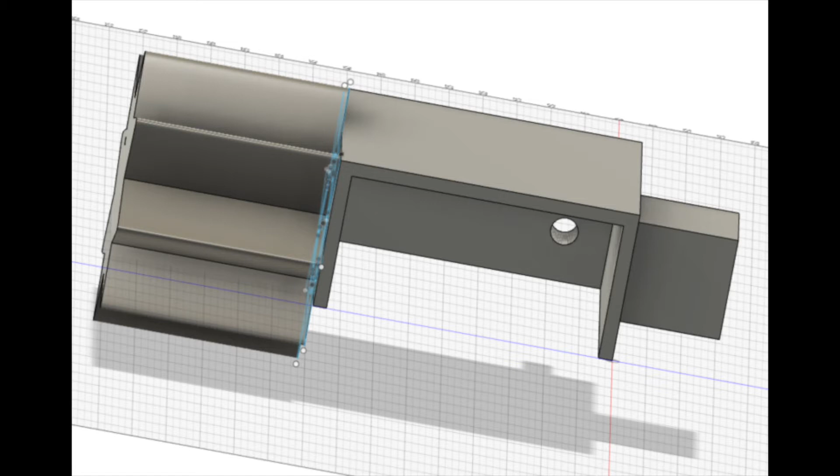The Model RS device is portable, inexpensive, and easy to install, while also self-sufficient, allowing nonprofits, corporations, or even governments to easily purchase and distribute them to rural communities that lack sufficient funds to pay for a more expensive model in bulk without additional installation or energy costs.

The device consists of a filtration system, pump, hydroelectric generator, and a holding tank, with the generator being its most unique feature. It harnesses energy from a river or stream water and does not require any external fuel or power.

The filter is a hybrid of a reverse osmosis filter and a standard polypropylene filter, with extra layers of sponges to promote durability. There are also replacement filters included with the device for cases of wear.

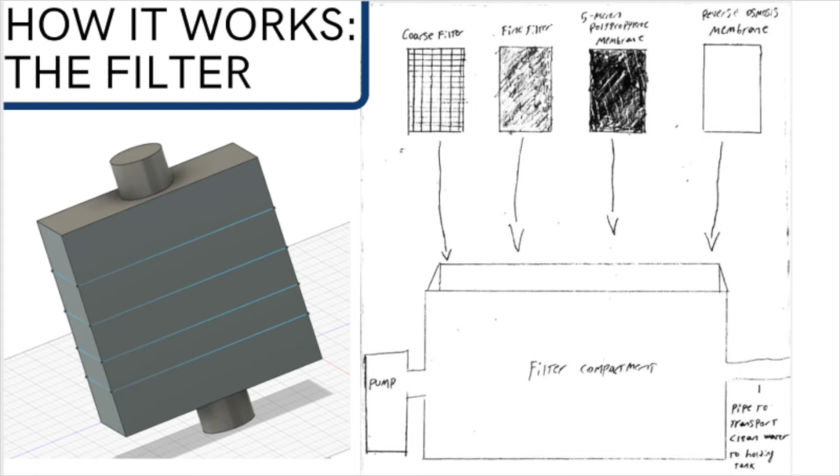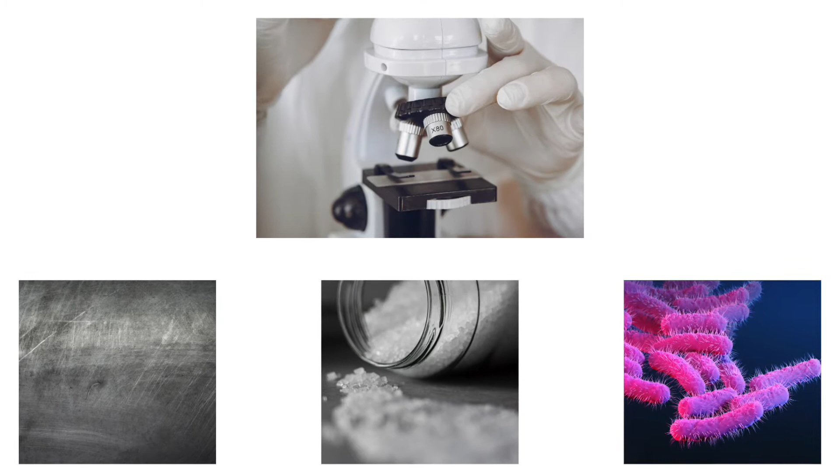All sizable debris is removed by the time the water reaches the RO membrane, with only microscopic bacteria, dissolved pollutants, even salt, and chemicals such as lead, copper, and sodium remaining, which are promptly eliminated during the RO process. Due to this, the Hydrovolt can be used in brackish rivers and estuaries.

The hydroelectric generator is divided into three parts: the stator, the rotor, and fins. The stator is a horizontal iron pillar that has copper-wound iron blocks on every one of its sides. The rotor, lined with magnets and a ball bearing, connecting to the stationary metal shaft, serves as the engine's protection to the internals from the water as well.

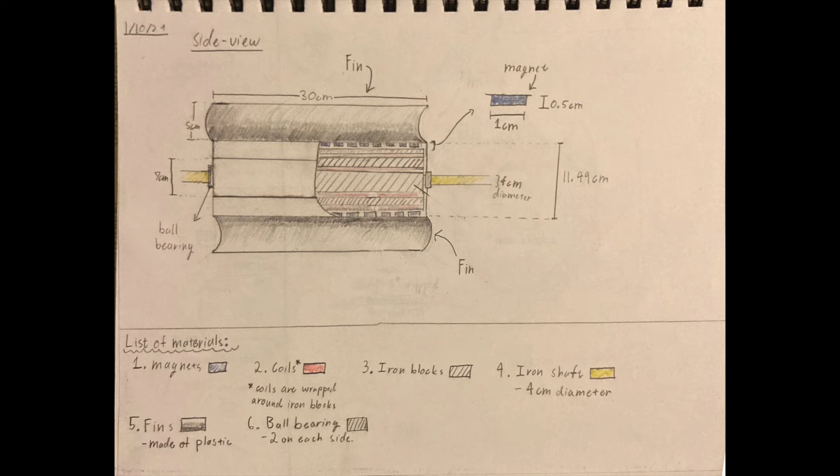The curved fins protrude out of the rotor to the base of the device to maximize the amount of kinetic energy received from the water currents, which rotate the rotor around the stator. This induces an electric current in the coils, and the quicker the rotor rotates around the stator, the more electricity is produced.

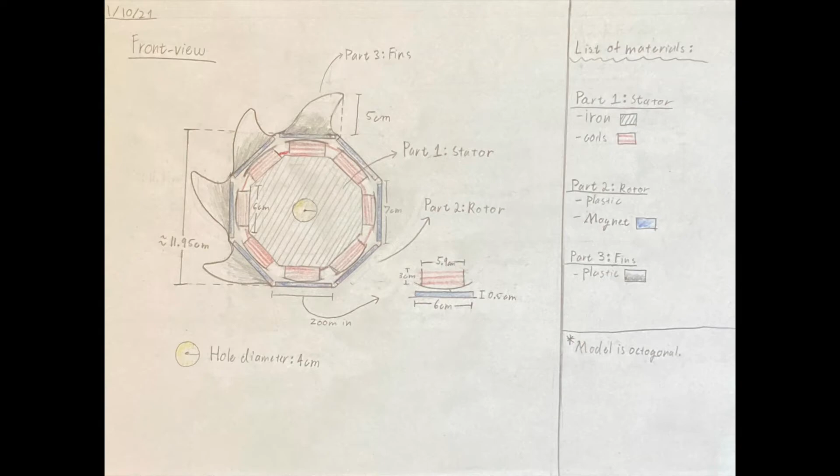The Hydrovolt Model RS is specifically tailored to fit the needs of small communities with access to only polluted water sources. It harnesses energy from the water that it is purifying and does not require any external fuel or power.

While Hydrovolt has competitors in the field of water purification, none address limited access to clean water and electricity in a cost-efficient and convenient manner. In fact, Hydrovolt is the first company to establish the new and promising field of hydroelectric water purification.

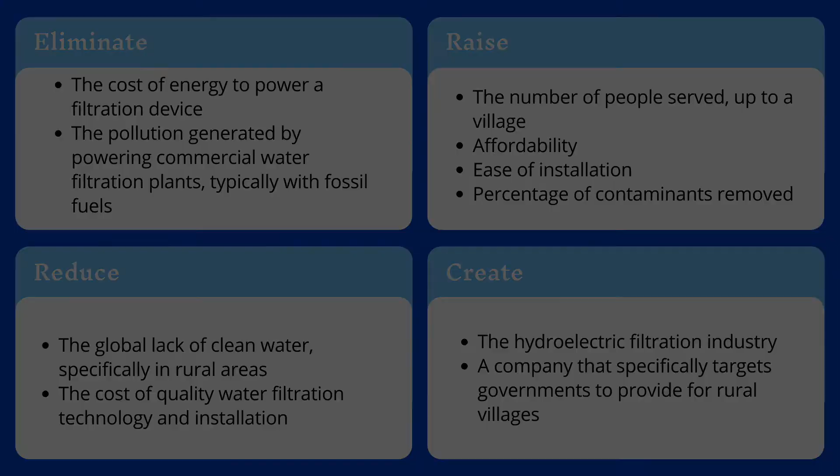Existing products typically fall into one of two categories: small and ineffective yet cheap and portable, or expensive, pollutive, and non-transportable yet effective. Using its unique filtration and energy generation technology, Hydrovolt creates an innovative new way to filter water, while also being transportable and cost-efficient, the ideal mid-size and cost-effective option which still maintains the efficacy of large, expensive models.

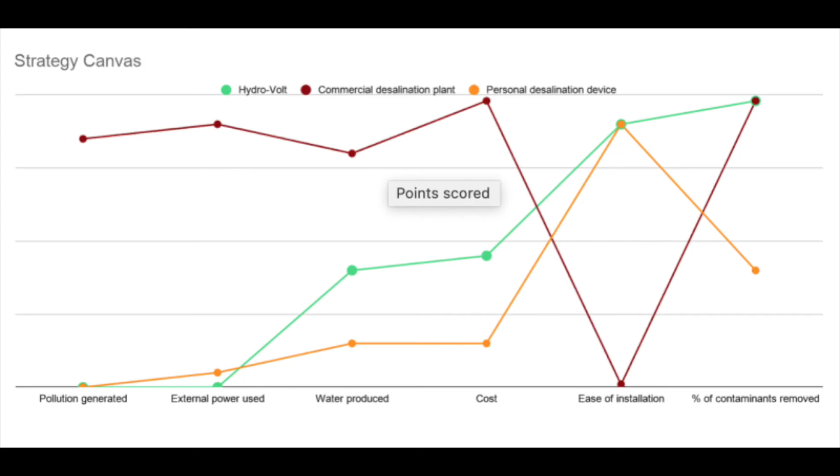As of now, our immediate buyers would be corporations who would purchase our products as part of a charity effort, then donate them to our ultimate consumers, the thirsty citizens of rural villages.

We also plan to expand this consumer pool to governments and factories with our new models. Our model could be rejected by corporations who want to maximize the amount of water filtered by their devices and that have few budgetary or environmental concerns.

An unexplored market for Hydro-Volt consists of restaurants near moving water, optimal buyers because of their high water consumption.

In our first year of development, we plan to gain visibility and funding for our endeavor from investors and competitions and begin making small initial sales.

In the future, we plan to increase our production rates to lead to financial stability from larger sales to corporations. We will also expand our selection by adding two new models, namely an ocean saltwater model and a factory model.

By year 5, we plan to capture over 5% of the current corporate philanthropy water-based filtration market, while also dominating our own self-created hydroelectric filtration market.

At this point, Hydro-Volt will be a well-established company earning approximately $31,347,066 in gross profit over the 5-year period, with over 113,990 filtration devices bought by corporations, governments, and nonprofits, and donated to those in need.